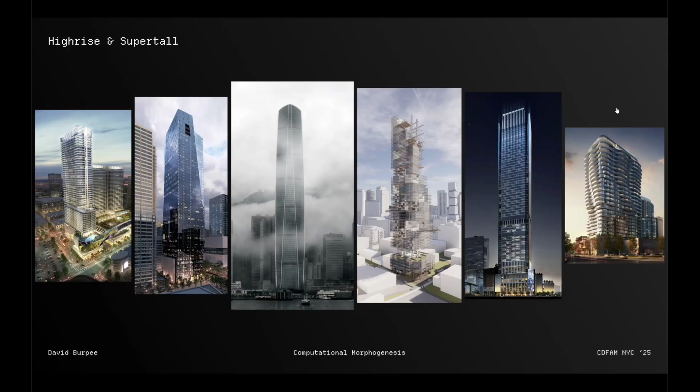So speaking of past, my past is in the world of architecture. I was a lead high-rise designer, leveraging computational design in the design of high-rise and super tall towers. I lived and worked in LA for a few years before moving to Seattle, where I did some projects there as well. So I have projects all up the western seaboard, as well as a few in Southeast Asia. And I was also always interested in these generative and emergent systems.

So I learned Processing early on in my professional career out of school, which if you're not familiar is an IDE and programming language. I think it was developed at MIT. Shout out to the MIT folk here. And I just loved building these dynamic systems that would control flocking algorithms and things like that. It felt like such a creative and expressive way to use coding and design. But I didn't really know how to apply it to my own work.

So I had these 2 disparate interests when I began my career. I had this hardcore, rigorous approach to 1,000-foot tall towers and designing 20,000 panels or something for them. And I had this very creative, more generative and exploratory side.

For the past 3 or 4 years, though, I've been primarily focused on footwear design and specifically using a tool called Houdini in that space. I'm not the only person that utilizes it. I'm sure we have a few users in here that use it for physical product, but it is not very common to use in that way. It's a procedural tool that's used mostly in film and VFX, but I'll walk you through a few ways in which I use it in footwear today.

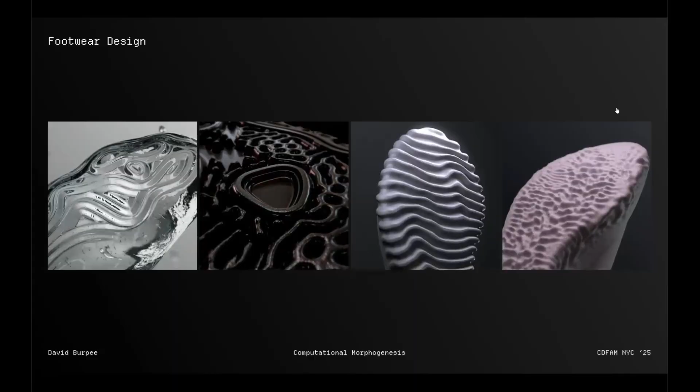And Houdini, being a dynamic procedural environment, allows me to use simulations, animations, algorithmic design in ways that I think are fairly interesting and maybe offer an additional dimension over traditional computational design. So for me, it really allowed me to combine my 2 interests: computational design of physical product, but also this generative and emergent exploratory way of doing design.

So I would be remiss if I didn't talk a little bit about the AM of CDFAM, given that we're here. So I'll show you a couple of projects in this space. Like has been mentioned before, like any good little computational designer, I wanted to make some lattice structures.

So I built out a rig in Houdini to create some lattice geometry. And the concept is fairly simple, right? I wanted to be able to take an input geometry with associated data, in this case pressure map data, generate a graded, like a performance graded lattice structure with variable density, and then within the actual lattice typology have kind of additional layer of adjustability to vary beam width or wall thickness and things like that.

But I didn't just want to make one type of lattice. I wanted one procedural rig, which I could actually pick from a variety of different lattice typologies. So we have kind of the greatest hits of lattices here that we all know and love. The conformal kind of beam and node lattice, the stochastic Voronoi lattice with variable density, TPMS structures, and then kind of a space optimization algorithm there on the right.

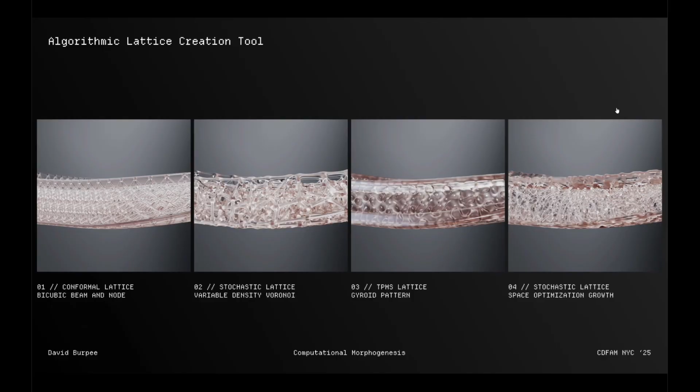And these are all performance graded in some way, either by varying, again, the density of the pattern itself or the beam or wall thickness, or in some cases both. And these leverage VDB geometry, which allows A, for really fast compute, and B, once these go to mesh, they are single continuous watertight surfaces that are additive ready.

So a little bit of an insight under the hood for one of these setups. This is the conformal lattice setup. And I know the middle looks a little scary, but the control mechanism is actually in the top right. It's really just three parameters that I am looking at. And because it's procedural, it's consuming any input geometry that you give it.

And then really for the conformal lattice, I'm just determining the subdivision amount, like the density of the lattice structure, the number of vertical layers, and then the unit cell type. And so you see the 10 or so unit cells there that I can pick from. And then the output is a nice conformal lattice structure that's ready to print.

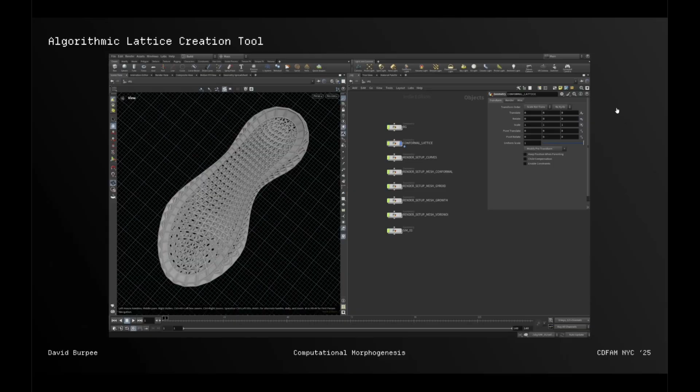Also being in Houdini, I thought, well, might as well squish this lattice structure. So just a visual simulation of what that looks like under some deformation. And once I had this tool built, I wanted to put it to use, and it allowed me to really quickly iterate through some design options for either additive or hybrid manufacturing footwear.

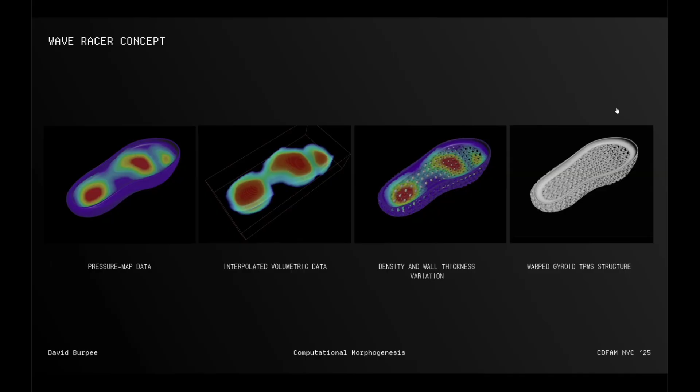So this was a concept I did where I wanted to create a unified generative pattern that would be applied to the upper, midsole and outsole. So across all three major components of the shoe. So again, straightforward process. Input the geometry data, in this case again, incorporate the pressure map data, interpolate that into volumetric data, and then use that volumetric data to vary density and wall thickness variation, and then output a warped gyroid TPMS structure. And I'll show you what I mean by a warped gyroid structure in a second.

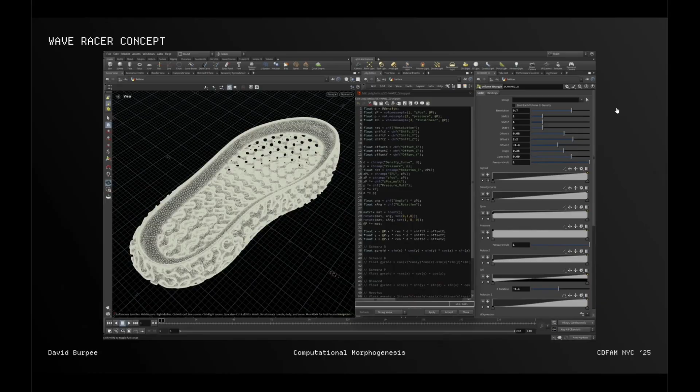So this is a little bit of a peek into this setup. The control mechanism is there on the right. So sliders and graphs, things that we're all familiar with. Some custom code that I wrote in a programming language called VEX, which is native to Houdini, and the geometry there on the left. The keen-eyed among you might see that there's formulas for all the different flavors of TPMS structures there. So Schwarz D, Schwarz P, Diamond, etc. So you can just pick from those as well.

And then I wanted to show this video mostly just to show the speed of compute when you're working at a volume or VDB level. So this is basically computing in real time. And once the setup is built, I'm able to continuously vary these TPMS structures, warp them, twist them, scale them, change their density, rotate them, and just manipulate them in a variety of different ways. And then eventually just compute them downstream into mesh geometry.

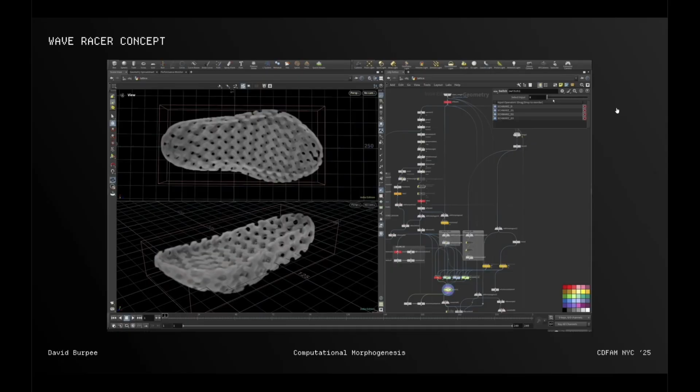And again, change the different kind of TPMS. This is, I think, the Neovius, which definitely has the coolest name anyways, and then vary the density of this one as well. So then just showing the cross-sectional data through those volumes, and how it creates the corresponding change in the wall thickness geometry. And you can also see the single continuous surfaces in this view as well.

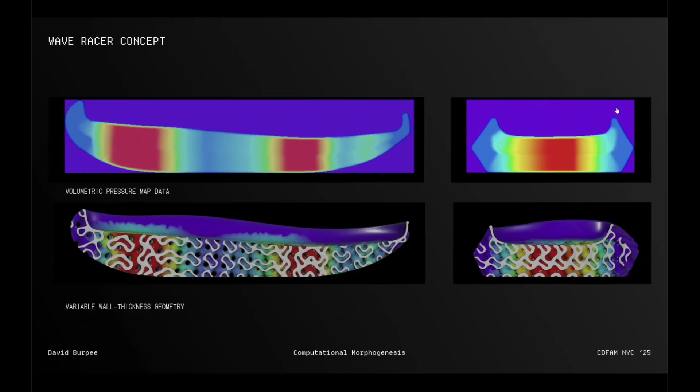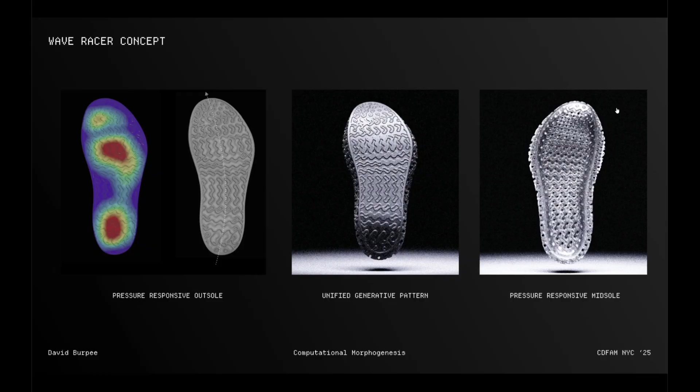Likewise for the outsole, I took the TPMS pattern and projected the 2D geometry to the outsole, and then again used pressure map to derive certain regions of the outsole geometry. So where we have high pressure zones, it's creating these solid areas. Where we have lower pressure zones, it's usually just creating the outline of the pattern.

And then that white arrow you see is something that we sometimes use in footwear design. We call it a gait line. It's this theoretical line that we use to flow geometry through and create motion and movement. So creating this unified pattern between midsole and outsole, and then you can see the density variation in the midsole on the right, especially from forefoot to heel.

And then this is just kind of a pretty image. It's after you compute the volumetric values, it's the values that then drive the wall thickness generation downstream. And then again, applying that same kind of pattern principle to the upper, in this case, in these kind of solid areas that would be expressed on the shoe.

Okay, with that out of the way, we can actually get to the meat and potatoes of the presentation. So what the hell is computational morphogenesis? Morphogenesis is the biological process that governs the development of an organism's shape and structure. So it's a process that informs the shape and structure of something. So keep that in mind.

But he had this quote that I really liked, and I think is pretty profound today. And it says, "The programs that he would write had no end point and could run indefinitely. He says he would watch the changing image until he saw a composition that he liked." And that's really interesting, right? We always think of design as being this kind of finite process where we're searching for a resolution, we're searching for an answer. And this idea of letting something just emerge and being able to use time as a design element is pretty interesting.

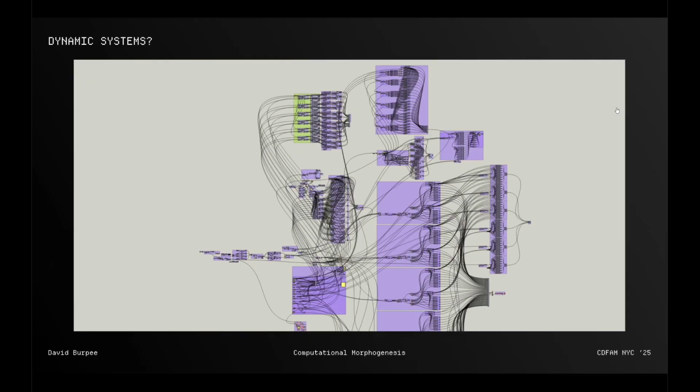And I always thought that was kind of a challenge, right? We make these systems that we spend so much time finessing and perfecting, and then eventually it gets critiqued and goes into something and gets made. But the beauty of the system is lost.

And so in a procedural environment, if you are designing over time, you actually have a series of these values that you can scan through, and all of those parameters can be interrelated. Some can control each other, some can consume each other, some might go away, some might be added, divided, whatever. But it provides you an additional layer in which we can actually inform computational systems.

So I'd like to talk about one project that I think exemplifies this usage of time. This is the EQLZ 360 performance basketball shoe.

It was designed by Brett Goliff with creative direction by Aaron Cooper. And the brief for this project was creating a shoe that was really for the shifty and dynamic player and the person who kind of exemplifies 360-degree movements. And so we wanted to create a traction pattern that kind of exemplified this from a performance and an aesthetic standpoint. And we wanted to use some kind of natural algorithm to do it.

The internal name for this project was the Duma, which, if you know Swahili, is another word for cheetah, which you see in the background here. And so we always had this kind of natural spin that we wanted on this project. And we landed on the reaction diffusion kind of classification of patterns. So I'm sure many of you are familiar with, thanks. And some of you have maybe even used before.

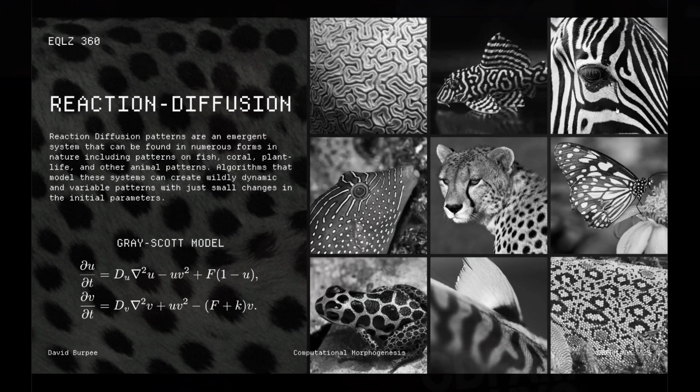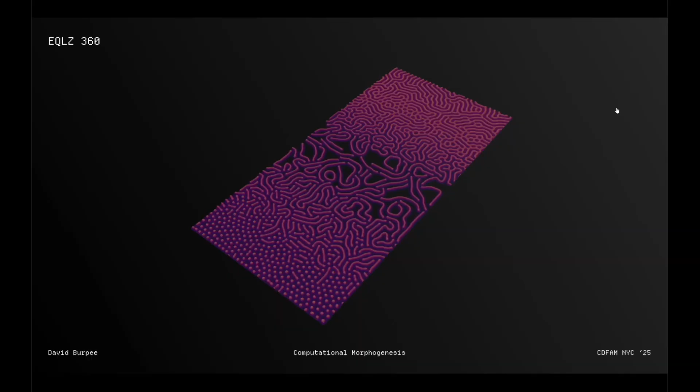And I've seen other reaction diffusion setups that have maybe 2 or 3 different patterns, but I didn't actually know if they could be continuously graded. So this was one of the early prototypes I did just on a rectangular piece of geometry, where I just varied the F and the K values across this geometry just to see, would it work? Would it create discontinuity? And I found that it mostly worked, but you can see that some areas don't get filled in and it's not quite perfect. So I needed a little bit more finessing.

And we wanted to basically take, again, these kind of high pressure zones, and we wanted to map certain pattern typologies like this to certain zones on the outsole where we need high traction, high energy absorption, and then allow other zones to be a little bit more sparsely patterned so they can be more flexible and have lower weight. And this would contribute overall to a more performant outsole.

So I built this system that can consume this pressure map data. It can use a process called algorithmic gradation, which continuously varies. It takes that pressure map data and interpolates it to continuously vary the F and the K rates across the entire outsole geometry. And it creates this really interesting kind of emergent system that creates a performance-driven pattern directly on the geometry itself. So you can see the outsole here, just in a static view, and some of those pattern typologies and how they correspond to different zones on the shoe.

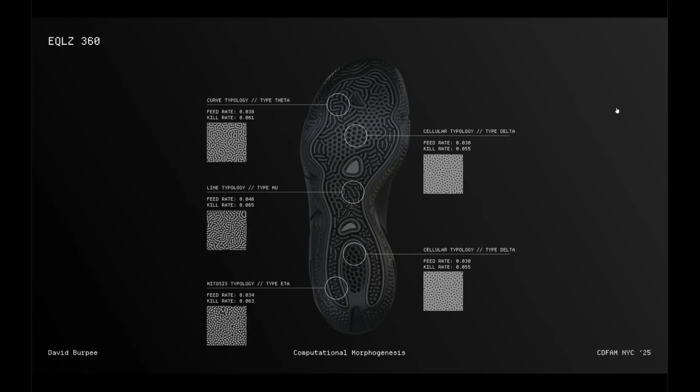And one of the challenges with a process like this, I sometimes show people that simulation, and I think they believe I just hit the reaction diffusion button and send it off to tooling, but to have a fully proceduralized system, it actually requires quite a lot of setup and control to kind of wrangle this dynamic system to actually, at the end of the stream, be able to go to tooling geometry.

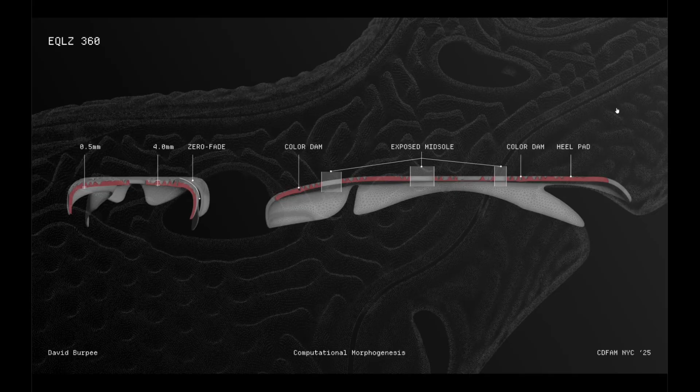So again, given this is a physical product and using a VFX tool, we have to ensure that there's some dimensional tolerances and things that we're hitting. So we have 0.5 millimeter web thickness, 4 millimeter overall traction pattern. There's certain features like the kind of zero fade up the sidewall, and again, the kind of responses to the different color dam and other zones on the midsole that had to be accounted for.

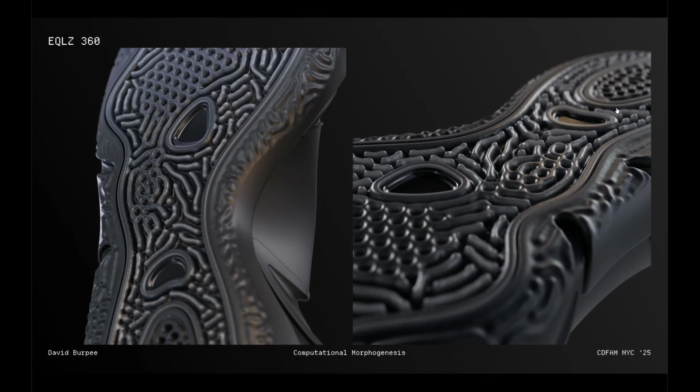And so a couple of detail shots of that, and you can see kind of how that pattern respects some of those boundaries, how it fades in certain areas, how it kind of dances around some of these spots, and all the while kind of maintaining its ability to be manufactured, so hitting kind of dimensional tolerances and material dimensions as well.

Once you build this procedural system, I don't have to go back and say, oh, I want to animate this now. Because it's an ingrained part of the creation process, all of this is stuff that we can just kind of showcase. So you go back to that Grasshopper definition, and it's really difficult to decipher what it's actually doing. But I think when you show people and you can actually sit with them and watch it grow and watch it change and watch it morph, the system kind of becomes self-evident, and everyone in the room can kind of understand, even if they're not a computational designer, how it's working and what it's doing.

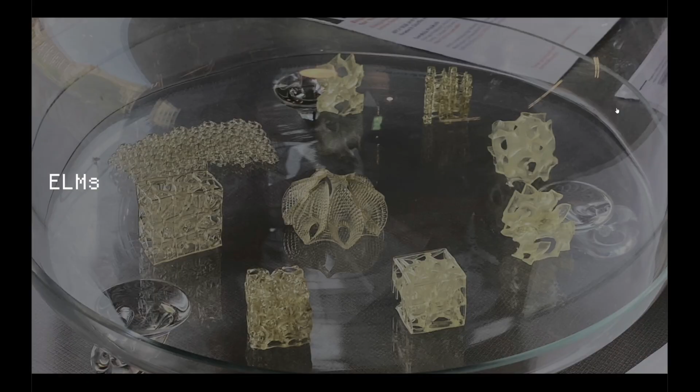So then quickly, I'd like to talk a little bit about engineered living materials. So as I mentioned earlier, I co-teach 2 classes at the University of Washington in the Master of Architecture program. I co-teach them with Professor Gundula Proksch and teaching assistant Kinsey Drake. And this is an NSF-funded grant project amongst 3 universities with a really diverse range of interests. But our classes look specifically at utilizing living materials in the built environment and what it means to design them. How do you validate with them? How do you create these things for design?

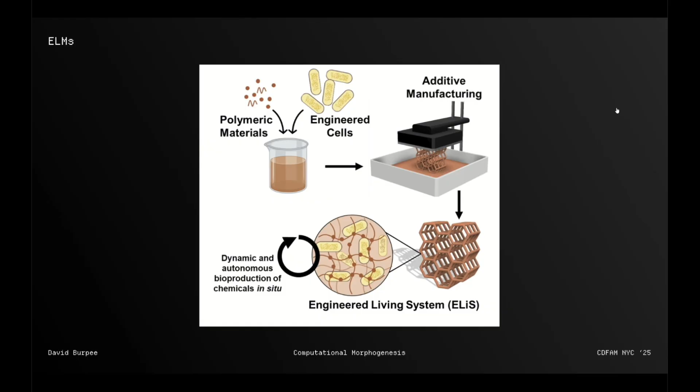So for those of you that don't know, engineered living materials are embedding engineered cells, living cells, into 3D printable polymers, which then elucidate certain dynamic behaviors like self-strengthening, self-hardening, bioremediation, filtering out toxins, biosensing, and a host of other fairly interesting dynamic processes. So this is one example that I think is pretty interesting. This was research done at the Nelson Lab at the University of Washington, and it's strain learning in protein-based mechanical metamaterials. So these are lattice structures that are printed with living cells that, as they are exposed to stress, actually self-harden in the areas where they experience stress and strain.

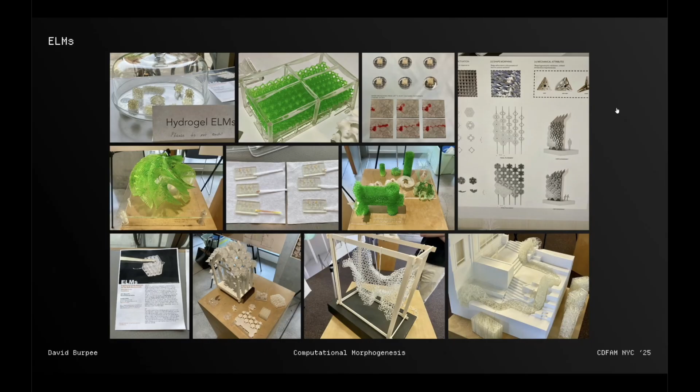So we talk a lot about programmable materials in computational design, but this is an example of a material classification that can actually self-optimize after it is manufactured, in situ and in its application, which I think is pretty fascinating. And then a few images from the student work. They were dealing a lot with various lattice typologies, and many of them were trying to explore this notion of how these things will change over time. And I think we found that with the typical CAD approach, methods, and tools, it was really difficult to start to communicate how these things are changing, to try to model their behaviors and things like that. And we found that it was really not sufficient.

So I'll leave you with this. I believe that some of the same kind of processes and approaches that were used by Dan Cooper in the early 80s, and some of the same approaches that I used in Houdini to generate footwear, are some of the ways in which we need to look into the future in order to design with these living materials that can change and create these complex systems over time. And I would urge all of you to not underestimate the power of time in your designs. Thank you very much.